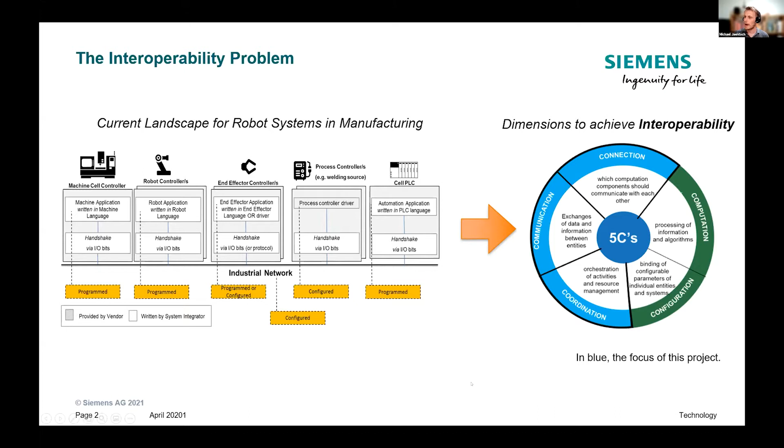Again, why is it difficult? It's basically difficult because it's a lot of effort, and you need experts, especially when you're talking about protocol bridging, when one controller speaks one protocol and the other speaks another, and you have to do this specific connector between the 2. You need an expert that actually knows both of those protocols, right? And that may already be difficult to find. And then that person has to sit and write the code, and that is effort. Sometimes that integration cost comes to several times the hardware cost.

I already talked quite a bit about the one-off solution problem, that we have to do this over and over again. And of course, the whole technology can be pretty intimidating. Most of the time, these integration efforts would be done on the shop floor and tested on the shop floor while the robots are moving and the machines are there. So it's not really an environment where coding is very easy, and where you would be allowed to make many mistakes, right? So that's why it could be intimidating.

What do we concentrate on in this project? So of course, on the one side, we have the robotic systems, which are pretty easy to interoperate when we have all the ROSs in play, because between ROS Industrial, ROS 1, ROS-II, it's pretty straightforward to come to an interoperability. I think, especially in this round, we all kind of know how to do that.

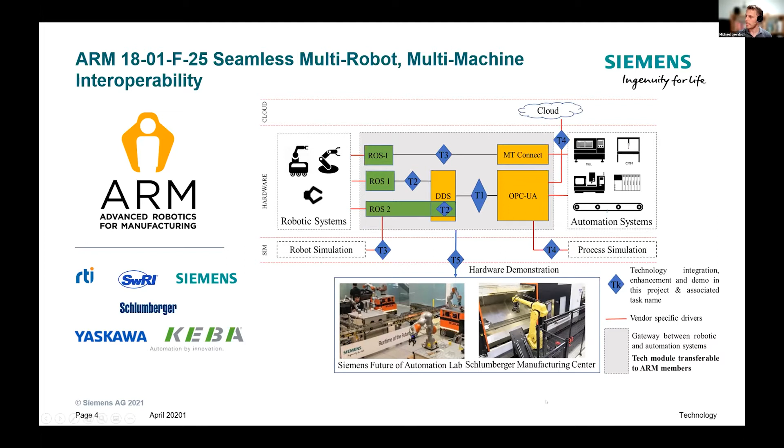So let me explain what we did. I was talking about the interoperability between OPC-UA and DDS. So essentially, a gateway was developed which can be configured. So you don't have to really write this point-to-point connection. You just have to instantiate that gateway and basically engineer it, which makes it a whole lot easier. You have to engineer which OPC-UA tags you want to map onto which DDS topics.

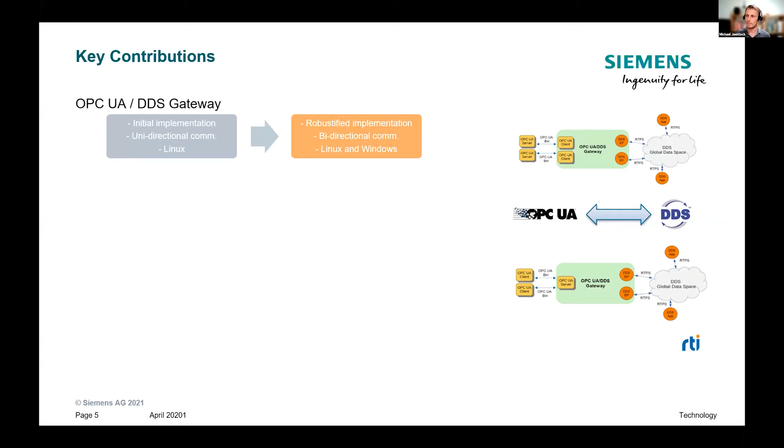There was a previous implementation which was pretty basic, only Linux, only unidirectional communication. There was a standard already out, but the implementation wasn't quite there yet. So this was robustified. We had bidirectional communication at the end, and Linux and Windows were available. This is now part of the RTI product suite, so it can be used if you have an RTI DDS license.

We were looking at DDS and ROS-II interoperability. As I explained before, ROS-II is based on DDS. But what does it really mean? How to write a DDS component that natively talks to ROS-II? Why would you even want to do that? Essentially, if you want to write your ROS-II component, you always have to be in that workspace.

You have to define your specific actions and messages and all of these things. And then you can build it within your ROS-II workspace, and then it's a very integrated solution. But maybe that's not possible. You want your native DDS devices to talk to your ROS-II applications. This has been investigated by RTI, and it was made possible, and they have documented that, and it should be available to everybody. It's a product of the project.

Finally, MTConnect is not only a communication standard, it was also an implementation of how to work on this coordination problem that I was explaining earlier. Before, MTConnect was tightly coupled to the HTTP transport. This was moved completely to a standalone MTConnect Python package, and we put it onto DDS to make the communication much more flexible.

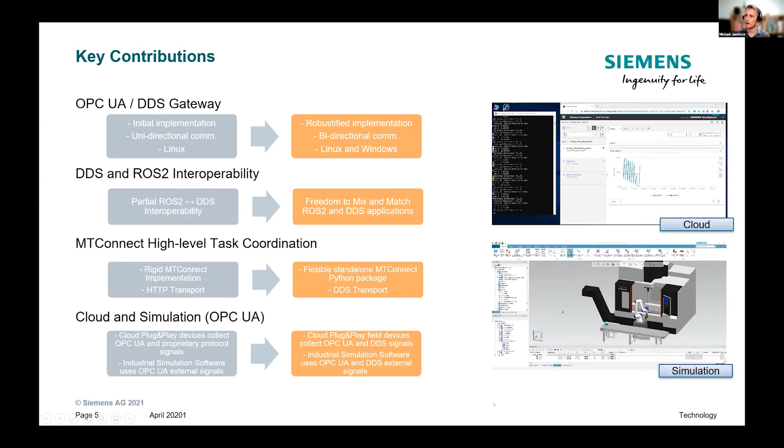Right, I was saying MTConnect coordination. This MTConnect coordinator is quite neat. It has a distributed scheme of operation, and essentially these distributed orchestrators advertise their skills, the tasks that they can execute, via topics, and we've chosen to put this on DDS because it's pretty straightforward to do that, since DDS is based on publish subscribe. And then they would talk to each other and see who can do which task. And by this distributed scheme, it also scales pretty well.

And then, as I was saying, from these MTConnect orchestrator instances, which are distributed, you can use the Python extensions, or you can easily extend it to, in the easiest case, just use some proprietary protocols or APIs to talk to anything you want to. But that is still pretty basic, and it's still this kind of point-to-point connection.

So on the next level, you can have your MTConnect over HTTPS still, as it was there before. So if you want to talk to, say, your CNC machine, which supports HTTP. We showed how it can be used to talk to any ROS or ROS-II device or robot, of course. And then finally, when you're talking to your PLCs or industrial software, which are offering their services via OPC-UA, you can use this OPC-UA to DDS gateway.

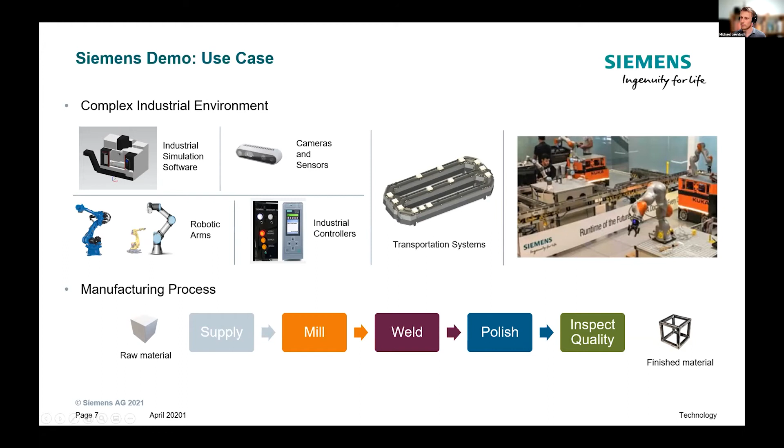Of course, with the simulation and the robotics, you have to have some imagination to see how this could really play out. But we believe from a technical perspective, we were really able to showcase the interoperability that we wanted to showcase. The manufacturing process that we chose was pretty simple. Basically, raw material needs to be supplied to the overall factory floor. Then it needed to be milled, then welded, then polished, and then quality inspected at the end, and you get your finished material. So you basically go through this linear process.

When we look at how this was implemented using the MTConnect coordination, you get an understanding of how this MTConnect orchestrator would really work. So we had the PLC, which mimicked that supply station where you would supply the raw material to the factory, and it would drive the overall process. So it was sort of like the line controller on the factory floor. And it would ask basically, can somebody help me with milling this material? And the simulated CNC would say, oh yeah, I can do that, but I need somebody to actually load the material into me so that I can mill this.

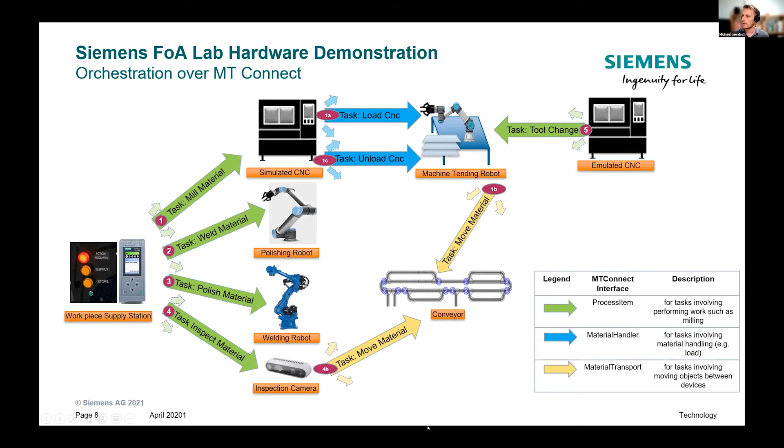The robot would say, oh yeah, I can do that, but I need somebody to transport the material to me. And then the transport system would say, okay, yeah, I can do that. And then the whole recursion would go back, and loading would happen, milling would happen, unloading would happen, and then go back to the PLC. Then the welding happens, the polishing happens, and the inspection happens at the end. So this is how the whole coordination worked. So from an integration perspective, we were showcasing all the different aspects, the orchestrators, the Python implementations of the orchestrators.

This would essentially talk to the OPC-UA server in the PLCs via this DDS to OPC-UA gateway. We had a similar setup for Process Simulate, where it was essentially reversed. We had the client in Process Simulate and the server in the gateway. So that, of course, in OPC-UA makes a big difference.

We had our DDS to ROS-II interoperability to coordinate or to integrate our machine tending robot. We had standard ROS, not ROS-II, to do the welding robot. We had inspection, which was just using a simple API from the Python orchestrator to the computer vision application. Another ROS node, and at the end, this native MTConnect device, which was an emulated CNC going forward.

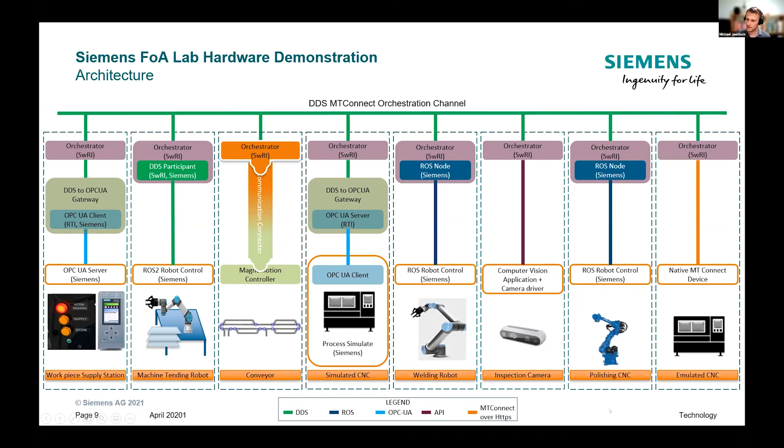I think I'll quickly jump over this. This was, sorry, no, I'm too quick. There we go.

This was actually a neat feature of DDS. Due to COVID, we had some additional restrictions. So essentially, we had one of the robots not stationed in the same location where the rest of the factory was. This robot was placed in Berkeley, and the rest of it was in Princeton, New Jersey, so really on opposite coasts of the country. We were still able to run the whole coordination via DDS, basically via the WAN, via the internet, using a VPN between the two.

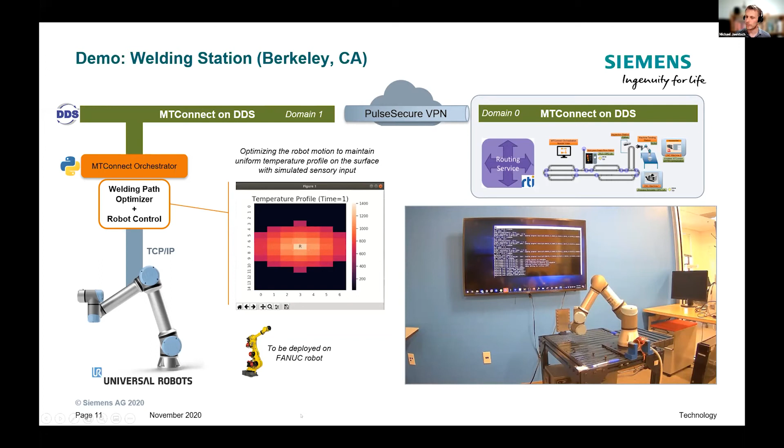And it was pretty easy to use this DDS middleware to run across VPN, even discover the universal robot was there with its MTConnect orchestrator, and then trigger the actions on this universal robot for the welding application. I can quickly show you the overall demo, how it then came to be.

Essentially, what you would have just seen was the supply of the raw material to the transport system. We had some additional delays in here for explanation. The transport system would drive it to the robot to be loaded into the simulated CNC, and then we had some interaction between the robot orchestrators. And then you see a little window of the simulated CNC down here.

This is Process Simulate, Siemens' simulation tool for process simulation. And you would now see the milling starting in a second. So doors close, milling happens. And then when this is done, the robot would take the part again out of the simulated CNC machine. Again, all of this happens across multiple protocols, and always via these tools in the toolbox that I was explaining earlier.

Otherwise, this demo might not even be too exciting to look at. Okay, there's a robot doing something. There's a transport system. Okay, why is that interesting? But if you imagine how many protocols are involved in the background, that's what makes this more interesting. Then we jumped over to Berkeley.

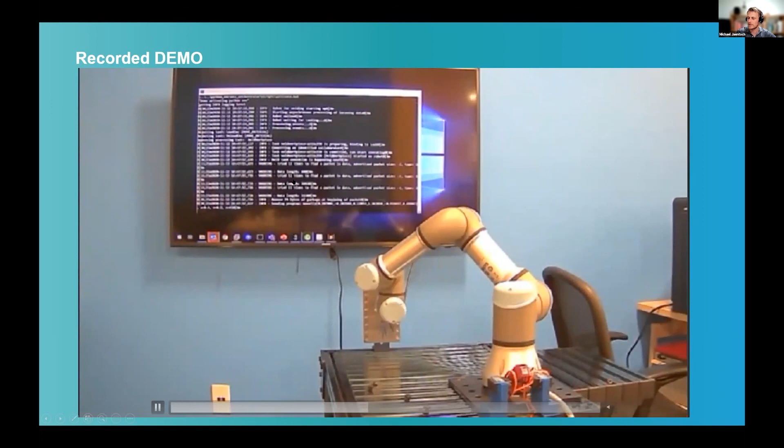And here we see the welding part going on. Here in the background, what you see is basically this MTConnect orchestrator receiving the commands. We see the welding simulation happening. This is actually another ARM project, which was finishing just about the same time as this project. So we were reusing the outcomes of this project and really triggering their robot demo from our overall scenario and the overall orchestration scheme that we had.

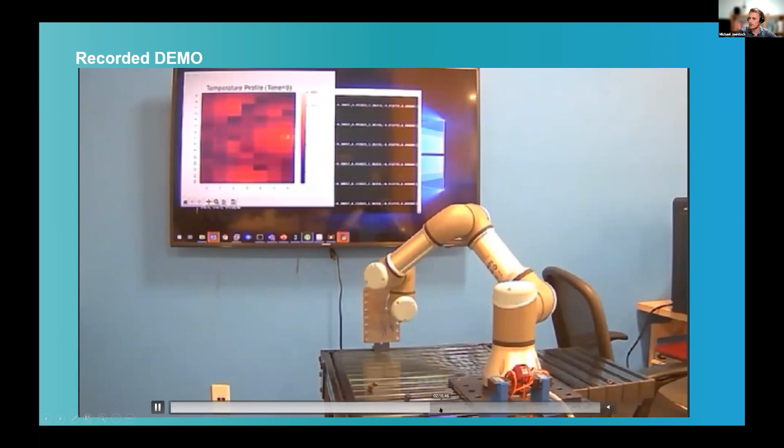And then when this is done, this would go back to Princeton, and at the end, I'm just scrolling forward a little bit, we still have a little machine tending operation happening, where this is now the MTConnect emulated CNC. You have to imagine a few things here, and the robot doing a machine tending operation here in the background.

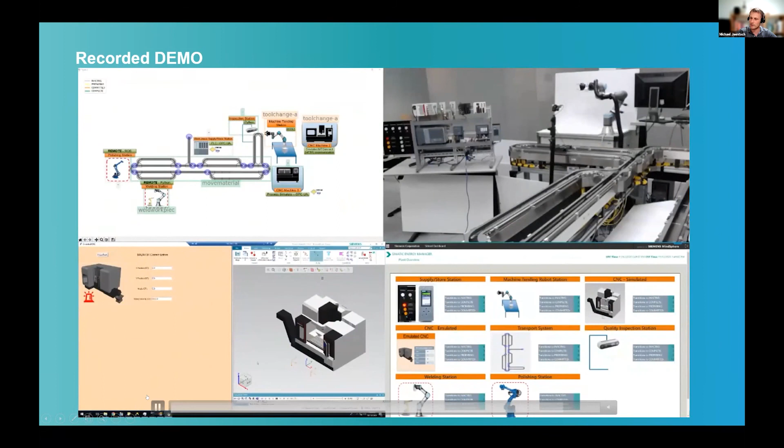Just summing it up, we have developed and hardened open source software based on open standards. All these tools that were developed are usable and can be integrated in your overall interoperability problem. Essentially, we successfully de-risked these communications, and especially the interoperability between them. We developed this reusable software, the MTConnect Python package, which is available from SwRI, and everything is accompanied by tutorials, documentation, and samples for all core software contributions.

Yeah, stay tuned for more on some of these new interoperability projects.